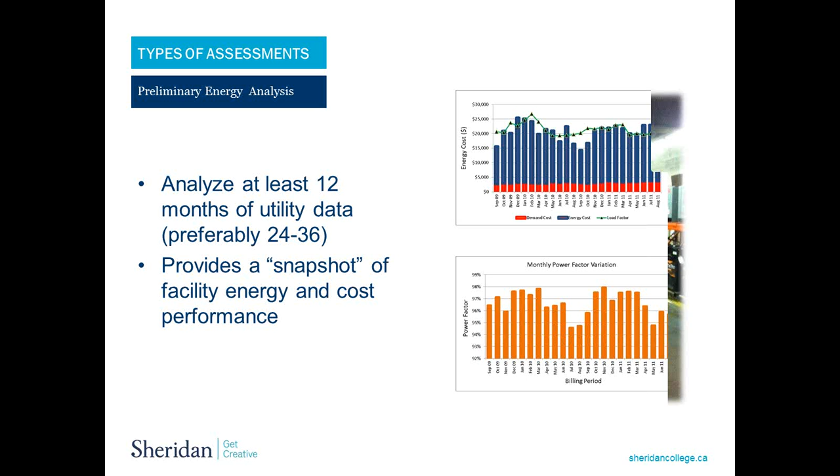ASHRAE Level 2 actually gets into more detail, evaluating the building and process energy systems in a lot more detail. This will identify opportunities for energy conservation measures, which we will then perform the savings calculation on: the energy, the cost of implementing the measure, the incentives that are available, and work out what is the payback on the measures.

So this allows the clients of this type of report to prioritize which type of projects they would like to start with first. And usually we start with the projects that have the highest rate of return, with the lowest investment and the fastest results.

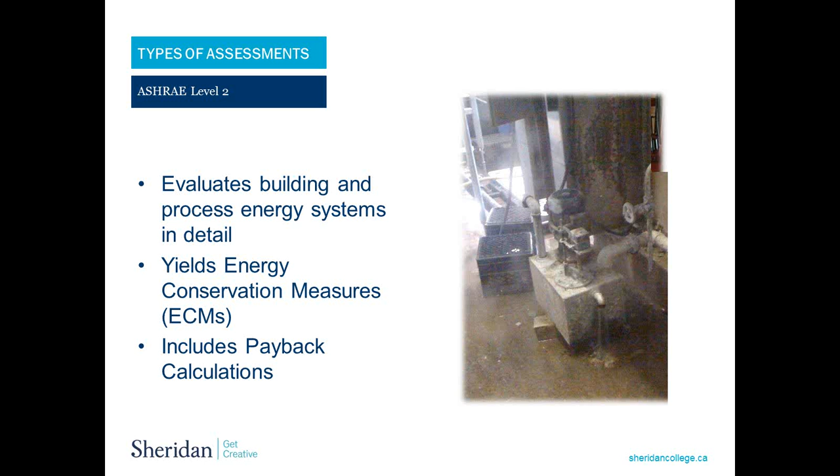ASHRAE Level 3 now is an investment grade study of the benefits, costs, and performance. We use this for complex systems in larger industrial operations such as car plants, etc. But it can also be used in the commercial sector and also in the multi-unit residential sector as well.

This may include 3D energy modeling, which we do with software provided to us through the National Renewable Energy Labs in the United States, and we also use RETScreen from Natural Resources Canada.

Before anything can start, we must get our local distribution company's approval. We can start without their approval, but we risk not being eligible for the incentive. So step one is to complete the audit funding application and have it submitted to the local distribution company for approval. Once that is approved, we can get started with no risk of not being defined as eligible later on.

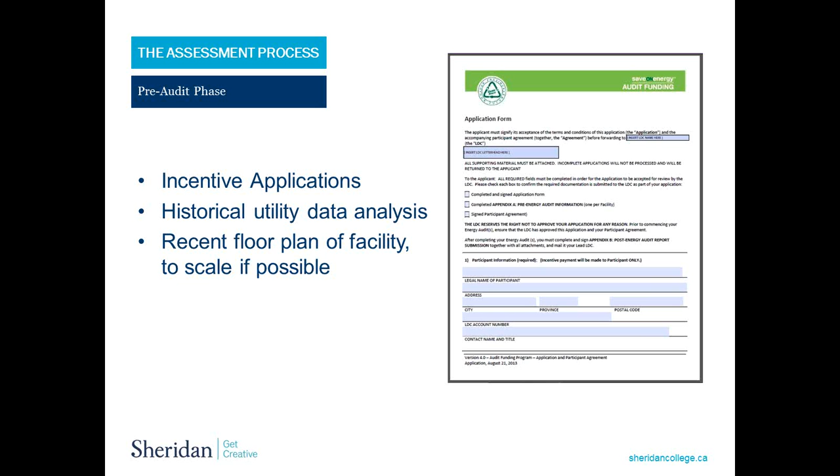We would ask for historical utility data and do the analysis as we previously discussed, a preliminary energy utilization. We need a floor plan of the facility to scale if possible, and we'll need a little bit more information as well. Just very quickly, let me give you a quick idea of the cost.

These are incredibly generous incentives. It's 10 cents for the first 30,000 square feet and 5 cents thereafter, up to a maximum of $25,000 or 470,000 square feet. From a Sheridan point of view, Sheridan provides level 1, 2, and 3 assessments, and this would represent about half of our cost as we work on a cost recovery basis. So the cost to the owner of the building is incredibly reasonable for the type of information they're getting.

For leased facilities, the incentives are a little bit less, but what we found is that the owner of the leased facility typically gets involved to maximize the incentives and understands the improvements to their investment.

So what happens? How do we start off? We've received the energy bills, we've done our analysis, we've arranged for a visit. We come in and we introduce our team. Our team is made up of research associates, aka students, faculty who are qualified CETs, CEMs, or PEngs, and faculty who are also engineers.

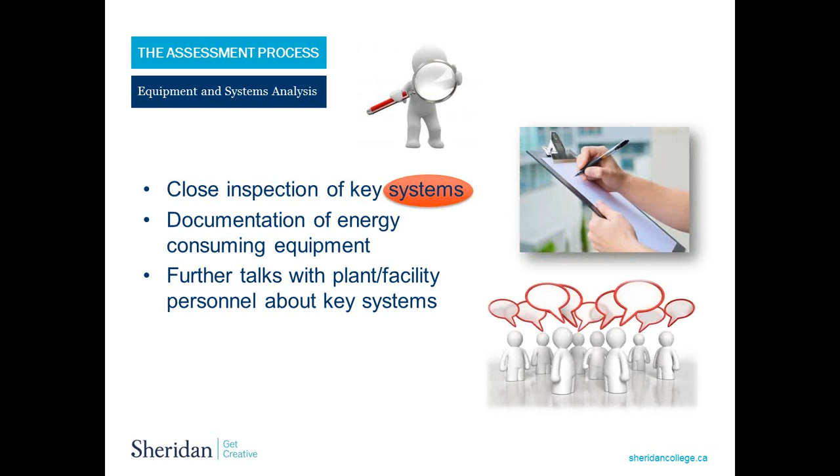Once we've done this level 1 walkabout, we're then able to provide an assessment report. This comes in 3 versions, and we don't have time to go through all 3, but I will be doing a case study, which is an ASHRAE level 2. The assessment process and report provide the energy consumption, the primary end uses of the consumption, what opportunities have been identified to save, and technical and cost analysis of the recommended retrofit measures. We'll then look to see which incentives are applicable to help the payback period, and we'll be moving on to next steps.

So in the debriefing on that first day's visit, we'll discuss the opportunities with the plant management and operational personnel. We'll identify what we call the low, no cost or immediate savings opportunities that they can implement before waiting for anything else, usually found in the operational and maintenance of the building. We'll also identify measures that may require level 2 or level 3 engineering analysis to provide confident numbers.

The assessment report looks at consumption and uses, opportunities to save, retrofit measures, applicable incentives, cost-benefit analysis including a simple payback, and we make a recommendation to proceed immediately with low or no-cost energy management opportunities. Short payback, high-return projects, and ASHRAE Level 3 assessments for larger complex opportunities are the next steps. So what do we typically identify?

What we can see here is a motor in your left upper corner. You see a thermal camera taking a look at a building envelope, infiltration, exfiltration. We see compressor tanks. We see a very poorly lit facility. The lower left-hand corner are actually battery chargers for forklift trucks. At the end of the shift, a company typically plugs in ten forklift trucks and sets their new peak for the day. An example of a thermographic picture in the lower right-hand corner, and this is a lot of our work, is rooftop units or air handlers doing the heating, ventilation, and air conditioning for the building. This particular roof has over 110 rooftop units, with the smallest one being 10 tons.

So we've delivered the report, we've gone over the report, we have a follow-up meeting, and it's been submitted to the local distribution company. What's next? Let's identify the projects together, work together, and get it done. That should start with developing an energy management plan, if we remember the holistic review, including a metering and verification plan.

So Janice gave us these links before, and I understand that Partners in Project Green is going to make this presentation available for those who ask for it. So all this information will be available upon request. And of course, you can contact your local distribution company, Partners in Project Green, or Sheridan College.

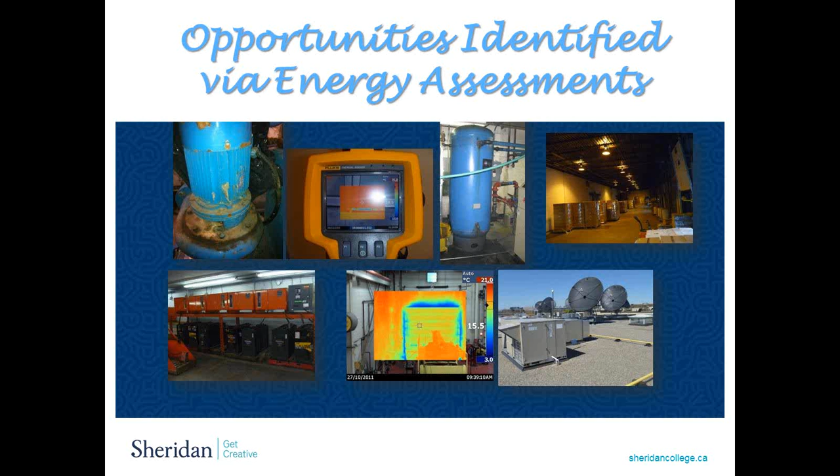Once we've been into a project and done a retrofit, there are key parameter measurements we have to take. In a lighting retrofit, we have to know the operating hours and the occupant behavior. We take a Hippocratic oath insofar as we promise not to do any harm—if we don't see an opportunity or a good application, we'll come right out and say it. Retrofit isolation, another example, would be the installation of variable speed drives and controls for pump flow, so we need to take a baseline measurement before installation and also a measurement after. It's just like going on a diet: when you start, you take your weight, set your targets, and continually monitor your weight to see how the progress is going.

We'll do whole facilities, and these require an energy management plan. Just to give one example, a lighting retrofit is usually one of the first projects a company would consider undertaking, typically receiving either the prescriptive or engineered incentive. But we go a step further. We know that by changing the lighting, we've reduced the kilowatt load on that building, which is heat, so the air conditioning system and compressors don't have to work as hard. We can then do an engineered calculation and verify it through metering and verification, obtaining further incentive payments for the client by identifying these reduced kilowatts. That's a simple example of a holistic approach—by affecting one energy system, you're most likely affecting another. For large capital projects, we can do very sophisticated, calibrated 3D simulations of the client's facility, allowing us to do what-if calculations and provide support for capital or operational budget decisions.

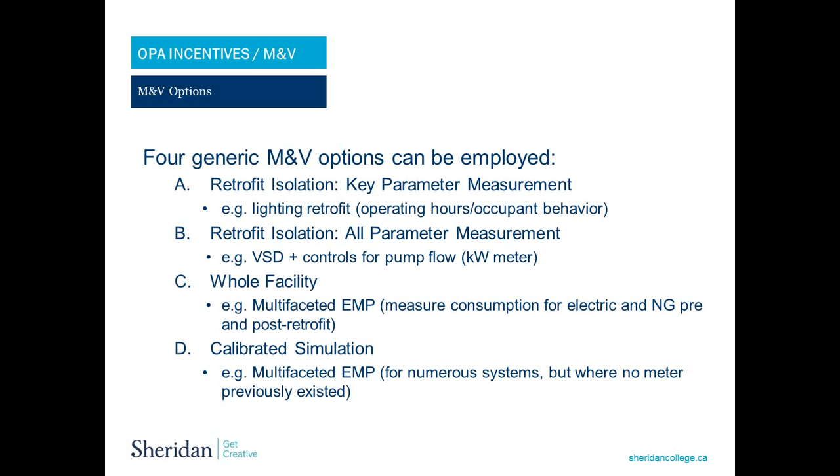So hopefully without missing a beat, let's take a look at an actual ASHRAE Level 2 report. We have the customer's permission to go through this, so we thank Magna International and Plascoat very much for their permission to do this.

This report was done in 2012. We follow ASHRAE Research Project RP-669 and SP56 - these are procedures for commercial building energy audits - and also Natural Resources Canada Federal Building Initiative Audit Standard Guidelines.

Immediately, right at the beginning of the report, we put up front for the customer where are the energy conservation measures. This report's been modified a little bit - we've removed one column, which was the simple payback calculations, which is really proprietary information for the company.

And they are ranked in order of return, simple payback, and the fastest to be able to realize results.

You can see in this particular case, we're looking at reducing their lighting load by 20%. We're looking at reducing their HID fixtures by up to 70%, which isn't trivial. So you're taking a 450-watt high-intensity discharge lamp high bay and replacing it with a 100-watt LED, which is providing more lumens, better coverage, a nicer light, and at about 1/10 of the cost, with about 10 times of the life expectancy of a standard T8 or T12.

We've identified occupancy sensors, which take care of human nature's sometimes forgetfulness to turn off lights, etc.

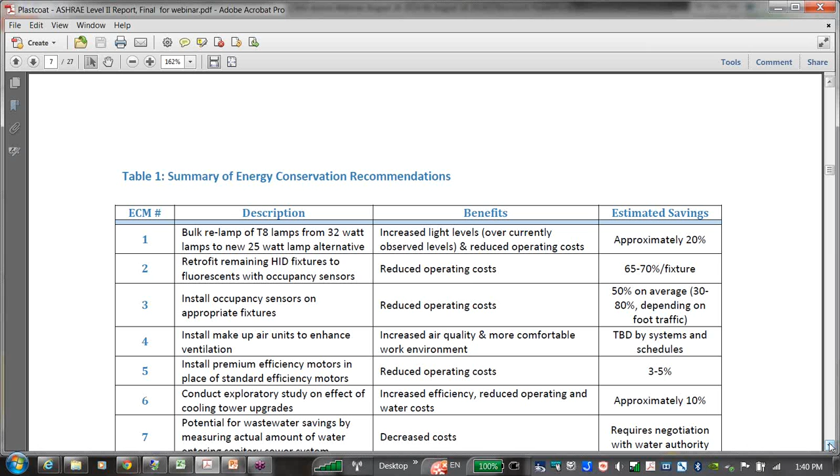We will recommend in this particular case the installation of CO2 feedback to the makeup air units, so that we're not just pumping air all the time - it's being pumped in as required.

We've done an exploratory study on the effect of cooling tower upgrades, and there are some incredible advances in technology in being able to do chiller optimization analysis in as little as a day, up to 1 or 2 megawatt sized chillers. They're also making vast improvements on premium efficiency motors with built-in variable speed drives, so there's incredible savings to be made there.

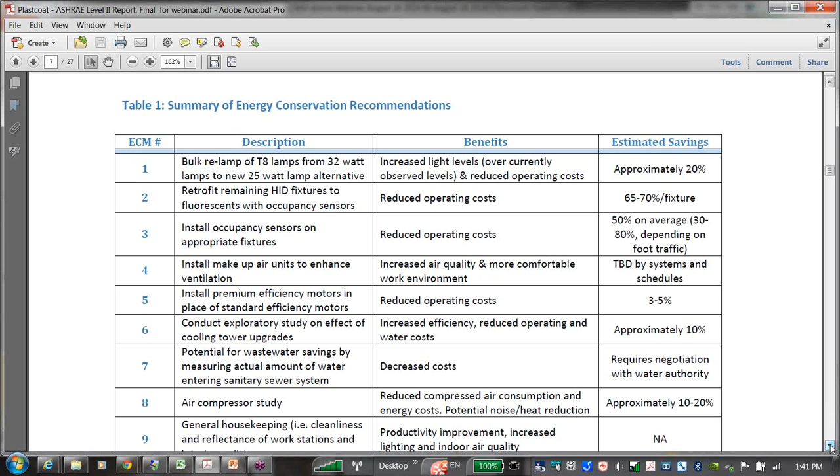Water savings are also an energy user and environmentally important. You need pumps to pump water - the less water you need, the less pumping you do, the less energy you use. And the less water you use, the less you pay for your water.

I wish I could get this to go away. Let me see if I can do that.

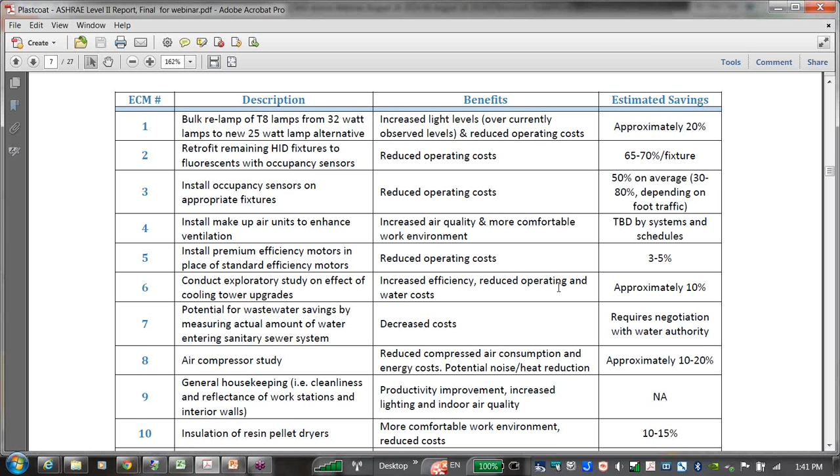Good. Air compressors are an incredible opportunity for fast returns and low investment. General housekeeping, insulation of the resin pellet dryers, and investigation towards their electric forklift trucks.

In that case, we ended up putting in timers to avoid all the forklift trucks from creating a new peak. This particular plant had a fairly poor power factor correction, which again is a relatively easy problem to correct.

By correcting that, you're actually getting $1 worth of energy for every dollar you spend. So if you have a power factor of 80, you're only getting 80 cents worth of electricity for every dollar that you're spending. Not only that, it really hurts motors and other production equipment.

So this is the 12 findings that we found on the very first analysis of this particular plant. And I can tell you that John Tallis from this particular plant is implementing each and every one of these measures, and was just telling us the other day that he's getting his budgets approved by senior management as they see the benefits of moving ahead.

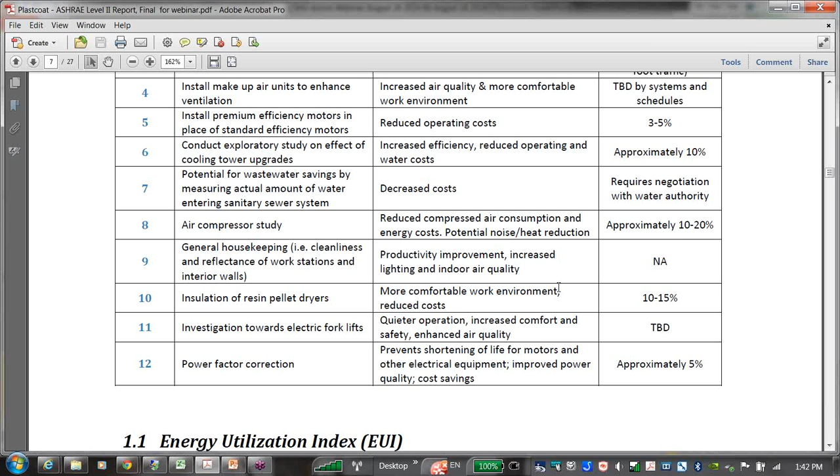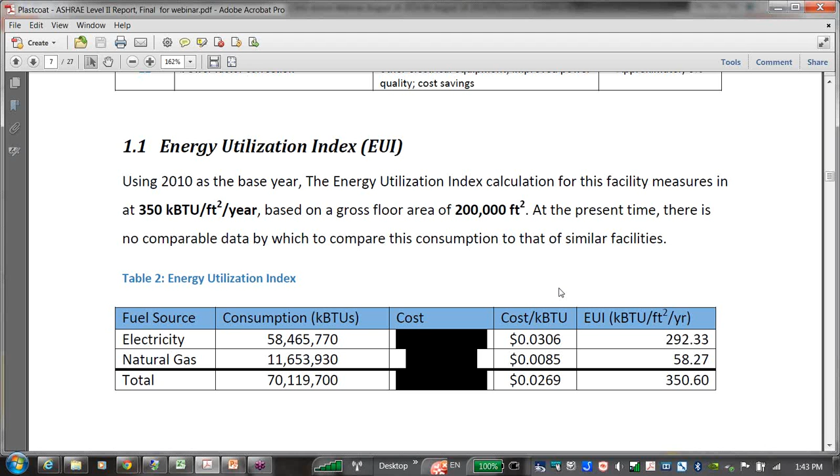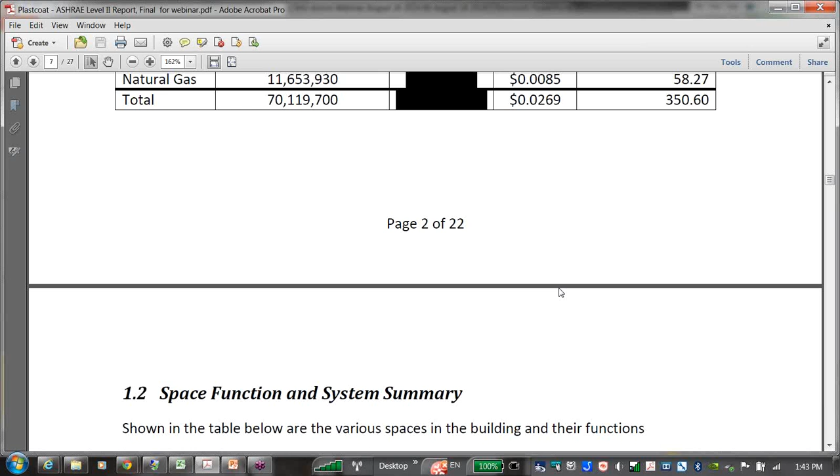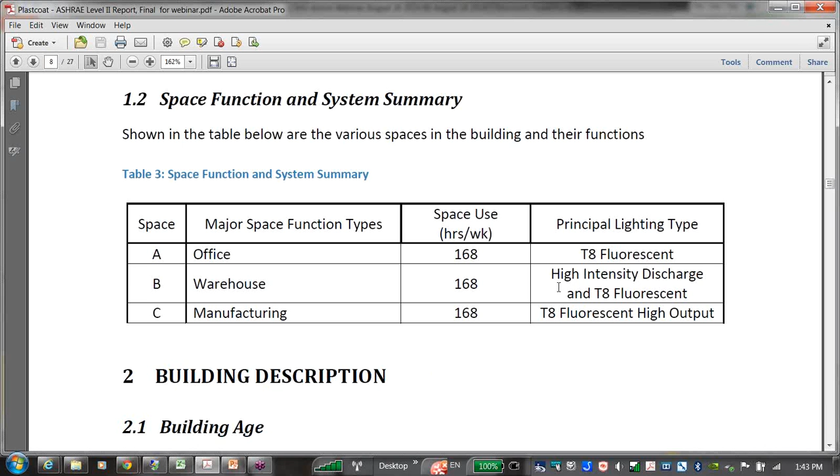Then we start getting into the details. We have to understand the space function and how that building works, and we start identifying the major energy users. The building envelope is part of the energy picture, so we have to understand and analyze what type of building we're dealing with and what condition it's in.

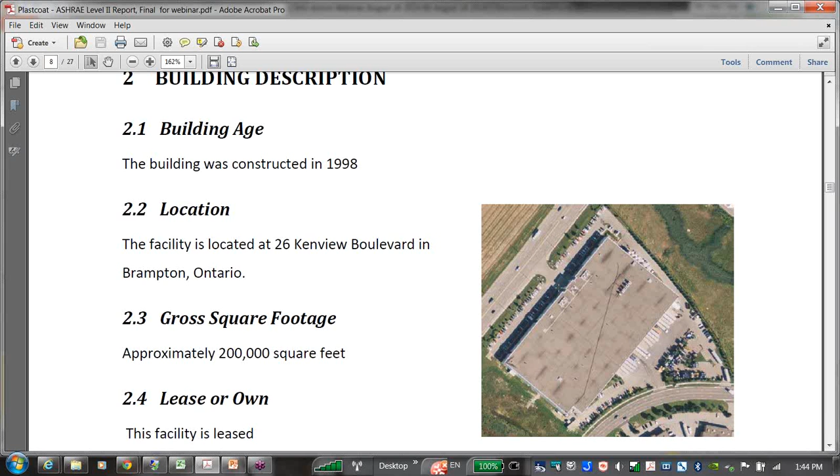We've actually found buildings with holes in the wall which are large enough to put your arm through, and they're wondering why they have very expensive electricity and air conditioning bills. We have to determine whether it's leased or owned for the incentives, how many floors, et cetera, et cetera.

How is this facility being used? In this case, it's predominantly used for the manufacture of plastic formed automotive parts. They also have a warehouse. They have 350 employees, less than 100 of which work in the office area. They operate 24 hours a day, 7 days a week.

So this becomes a bit of a challenge for us to go in and do our work. We end up going in usually during the evening shift. This schedule changes with the level of production within the plant, but this is their typical schedule.

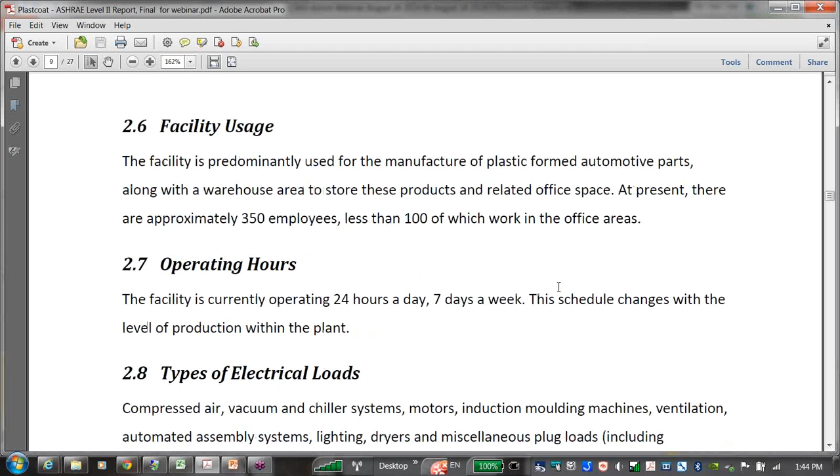Types of major loads: compressed air is used extensively, vacuum and chiller systems, hundreds if not thousands of motors, induction molding machines, HVAC and ventilation, automated assembly lines, lighting, dryers, and miscellaneous plug loads, including tons of fans all over the plant floor to try and keep the employees comfortable.

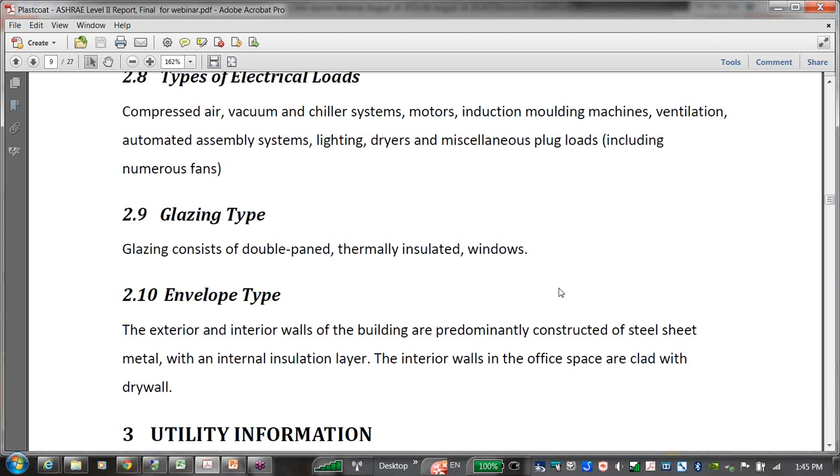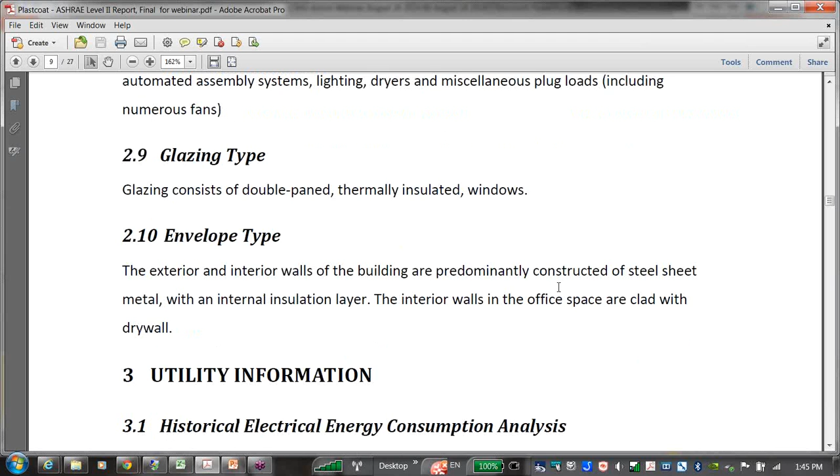We look at the fenestration, or the windows, to see what kind of shape they're in, and take some thermographic pictures. We will also do some preliminary envelope investigation, basically looking again for the R factor, what's the insulation factor, and what are the opportunities to address infiltration and exfiltration on that building.

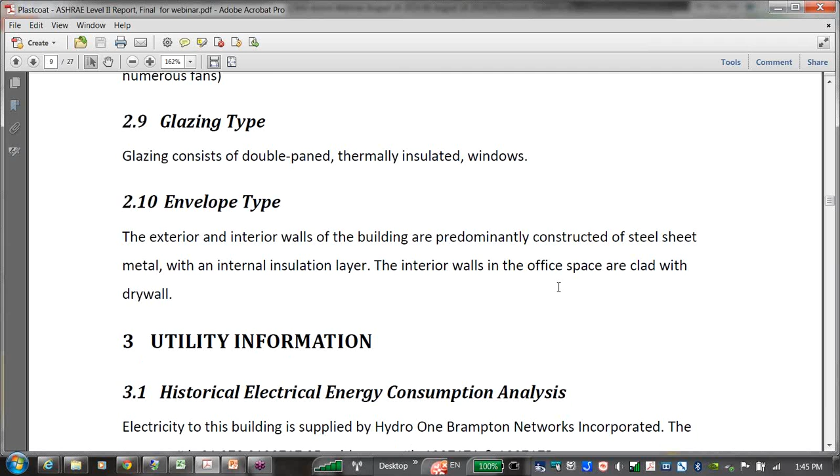We do a very detailed analysis on the electrical consumption on a minute-by-minute basis. Just a little footnote here, this particular facility has 2 meters, so when we're doing the paperwork for incentives, we actually have to do 2 applications based on each meter number, which is associated to a different account number, but both in the same building.

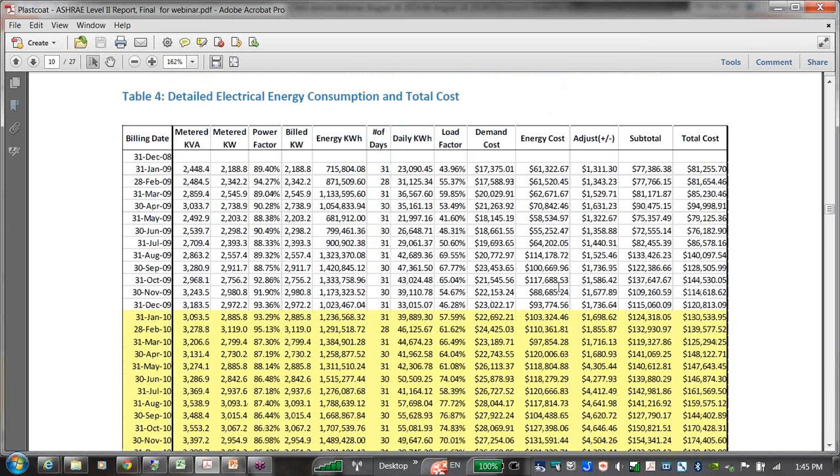We get into some quite detailed numbers. You can see that they have a significant load, ranging about 3 megawatts to 3.5 megawatts. So they have a substantial electricity bill, something that really affects their profit margin. We can see some totals - we're talking in the millions of kilowatt hours and millions of dollars to be able to pay this bill.

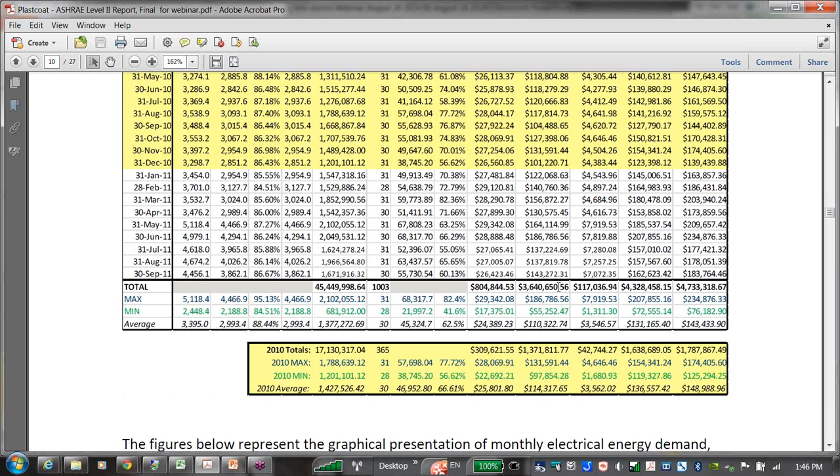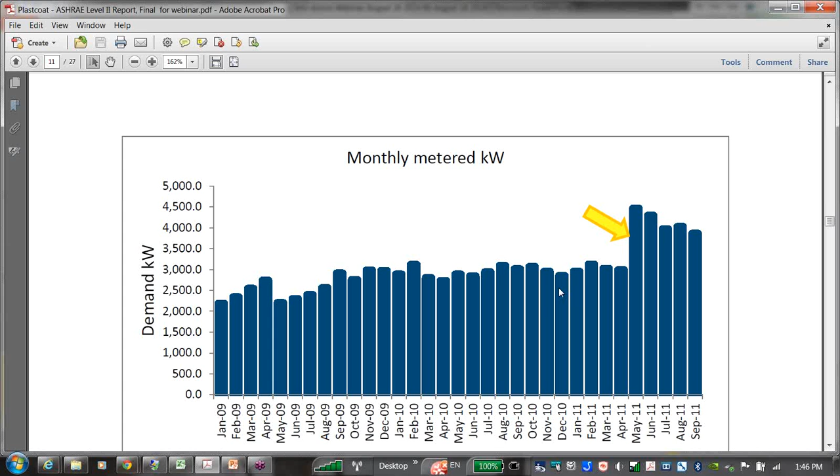So this is going to represent really how this particular plant operates. Again, here we're looking for anomalies. Here we found a certain anomaly in May that requires further investigation. As it turns out, they got a very large pressing order, and most of this anomaly was actually explained.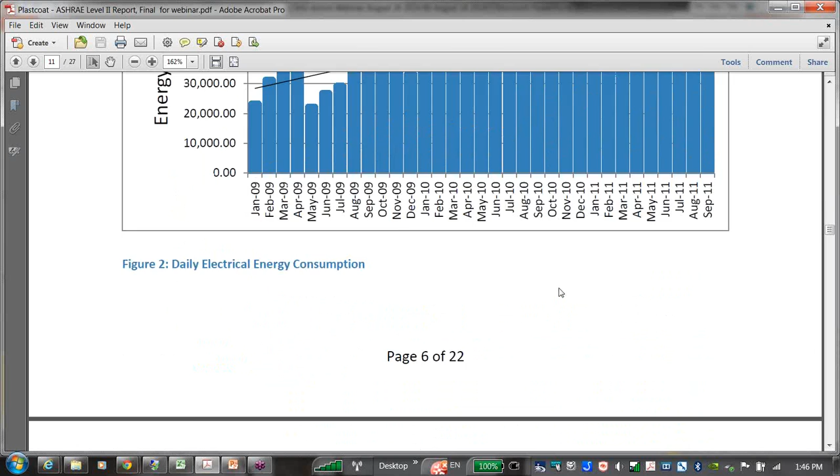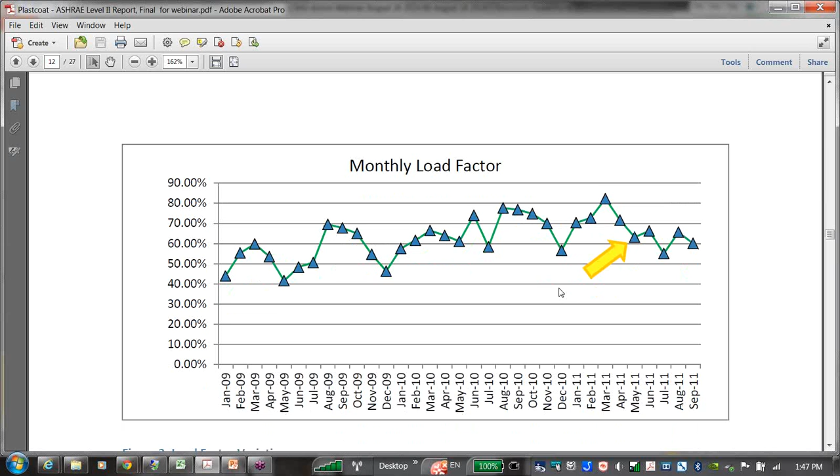We look at the monthly load factor to see how straight a line it is and where the load is going. So here we have a load jumping between 80% down to 40%. We'd like to be able to smooth that out as much as possible.

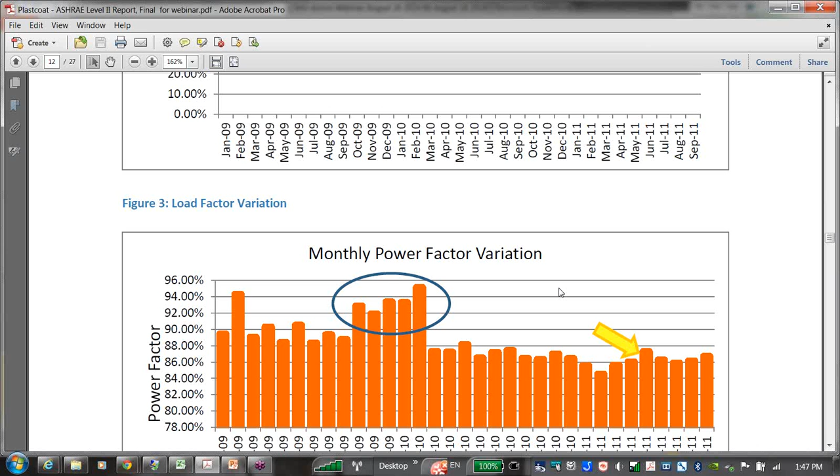Monthly power factor - for those of you who are not aware, there are two elements on your bill. You will pay for your kilowatt hours, and you will also pay for your kilowatt, or your monthly peak. So for the highest continuous three 5-minute periods anywhere during the month, that kilowatt reading is what you will be charged for the entire month for your peak load. So controlling peak is very important.

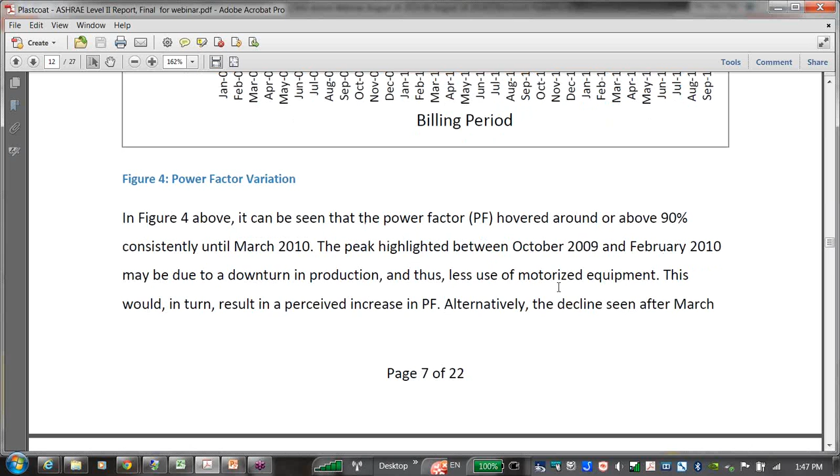So here the peak power factor was hovering above 90% consistently, and then we saw that there was a downturn. So we've actually gone in and addressed that.

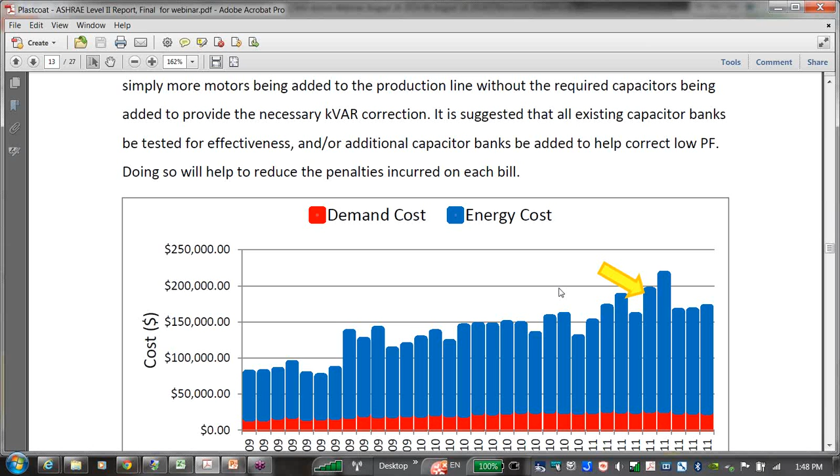Here we talk about demand cost and energy cost. You can see that the energy cost is the predominant portion of your bill, but demand cost is not a trivial portion either. So we must be able to control both. Think of energy as your odometer on the car that's counting the number of kilometers you're traveling, and think of demand cost, or kilowatts, as your speedometer, or how quickly am I spending that gasoline or electricity.

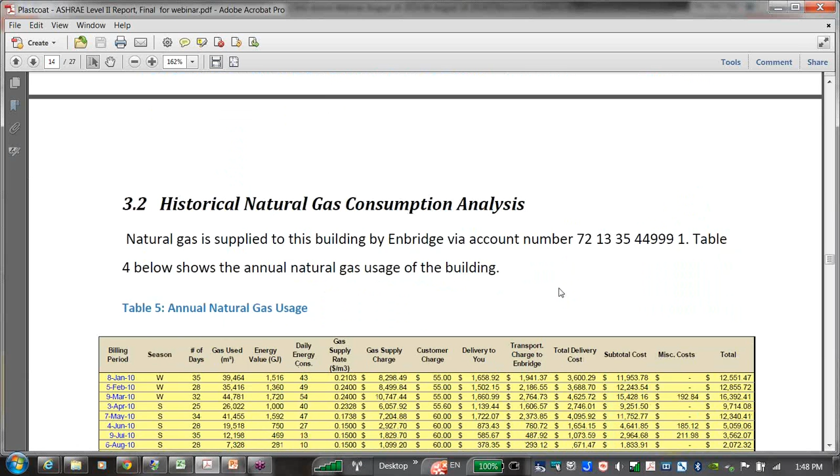So we go into a lot of detail, monthly energy and demand. We'll also then get into historical natural gas, and we work with the major natural gas suppliers in the province, and we'll come up with the same kind of information for their daily energy use. This is for analysis purposes, to compare to production processes to see where there may be something that could be improved.

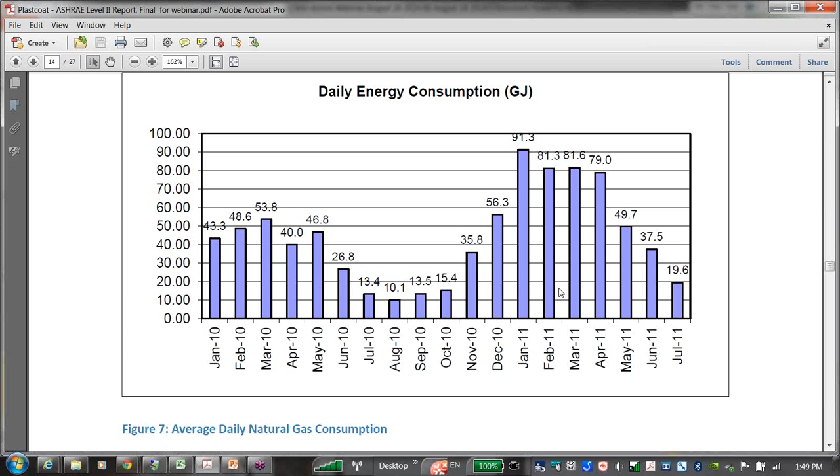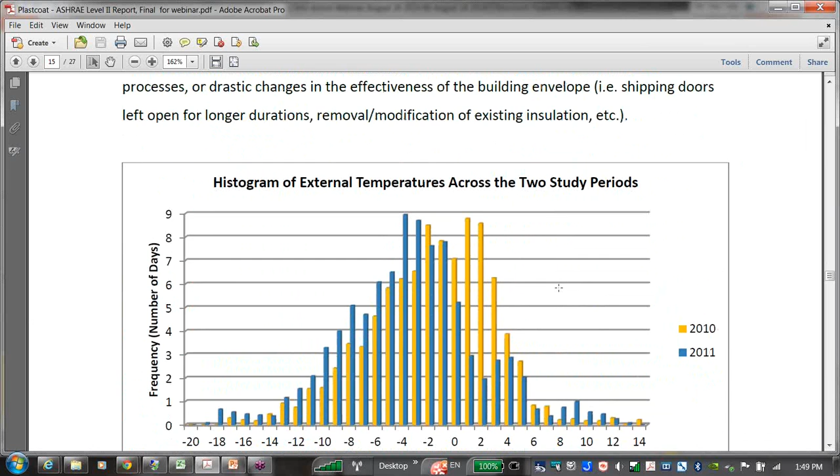So here the natural gas usage is normalized against external temperature for two study periods, and we can see that in 2010-2011 there were some significant changes in the weather and how the building reacted to the weather outside.

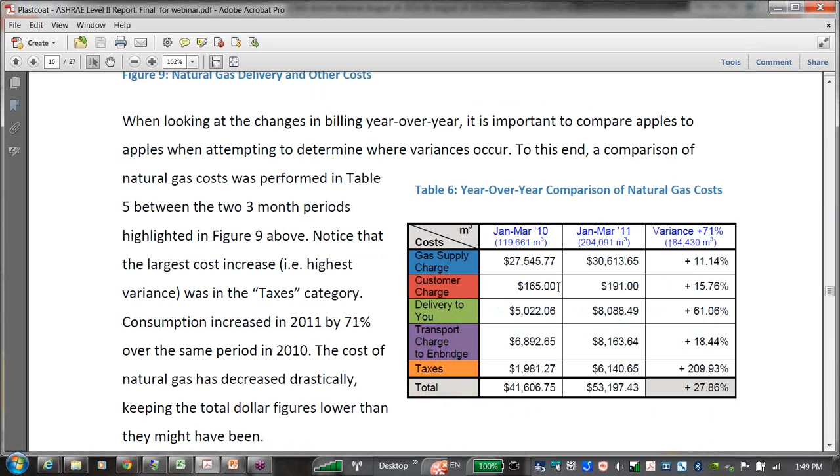So a cost breakdown of monthly gas consumption. What are the other costs? Here we actually look at a detailed bill, and in some cases people are in locked-in contracts, and one of the first recommendations we would make is to get out of any locked-in contract for electricity or gas.

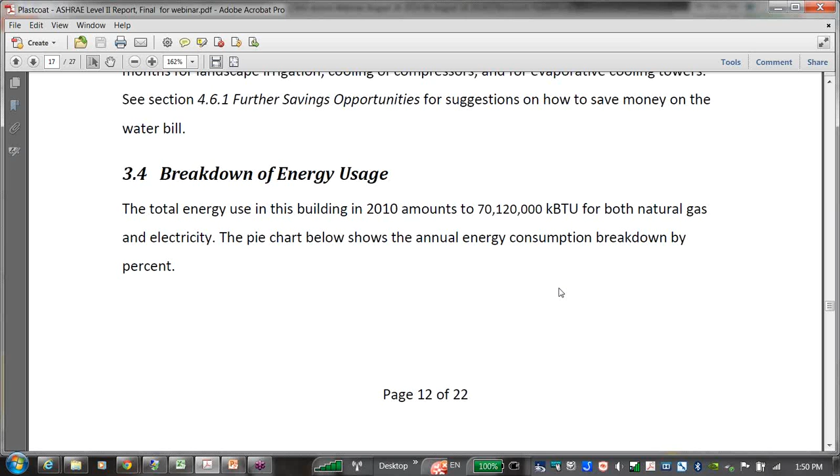So if you're the energy manager for your plant, where are you going to be spending most of your time? Energy performance summary - here we're looking at the totals again and what the total cost is, to give management a feeling for how significant this issue is.

We will then do cost indices to give a little more information, and we're really breaking it down here in energy utilization terms per square foot per year. We'll do analysis of the metered electrical load, and then we'll start with our recommendations in detail.

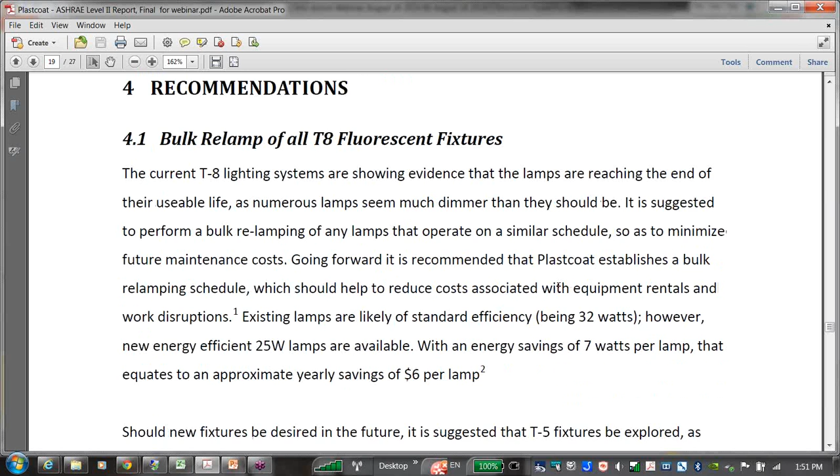I won't go through these recommendations in detail because we're just about out of time for this section, and I would either turn it over to the organizer or be open for questions at this point.

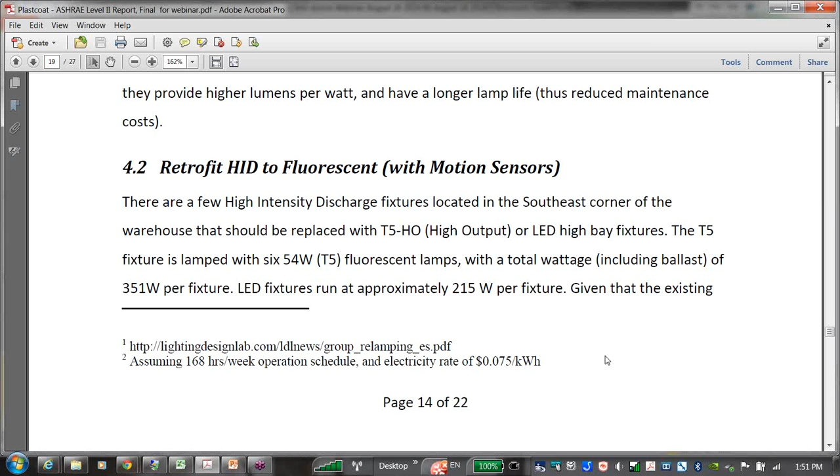Very good question. A level 1, typically in expended time, not calendar time, because there could be some time in between when we receive the bills and when we do the actual visit - but a typical preliminary energy analysis will take us a day. A walk around on the facility depends on the size of that facility, so obviously a large 3 million square foot facility will take us a number of days to do, whereas smaller ones could be only half a day. Our typical level 1 team consists of 1 faculty member, 1 staff member, and a minimum of 2 research associates, which are our students. A level 2 is a little more involved.

So we cannot start until the Energy Audit funding application is approved by the local distribution company, or we get their approval to start. The analysis typically will take a couple of days with the information we've received, which we enter into our software for regressive statistical analysis and cost utilization indexation. Then we will assemble our audit team, which is typically 2 faculty, 1 staff, and we try to go for 4 to 6 research associates, which, again, are students.